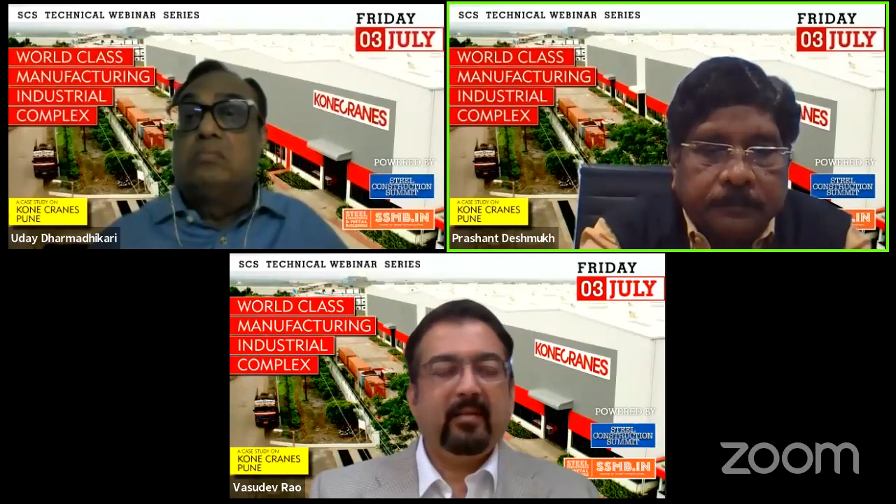Uday Dharmadhikari, Chairman and Advisory Committee, Indus Strategy Advisors and Managing Partner, Rebuild LLP. An innovative thinker with overall experience of more than 39 years and business leader for 18 years, he is known for brand building, creating profitable and sustainable business units, strategic alliances or partnerships in India and overseas, and growing startup organizations or business units to maturity level, with extensive experience and expertise in contract and project development management. He has also developed and implemented more than 10 million square feet of real estate projects in the fields of residential, commercial, hospitality, affordable housing, retail, educational institutes, healthcare, etc.

Now our speakers. Prashant Deshmukh, Principal Architect, Prashant Deshmukh and Associates, a ranker from JJ College of Architecture with an experience of over 40 years. He has designed and executed many industrial, commercial, and educational projects, which have won him highest appreciation at the national level. Prashant has received awards for his professional contribution on many projects. Deshmukh's papers in architecture, project management, and professional practice have been published by leading newspapers and architectural magazines.

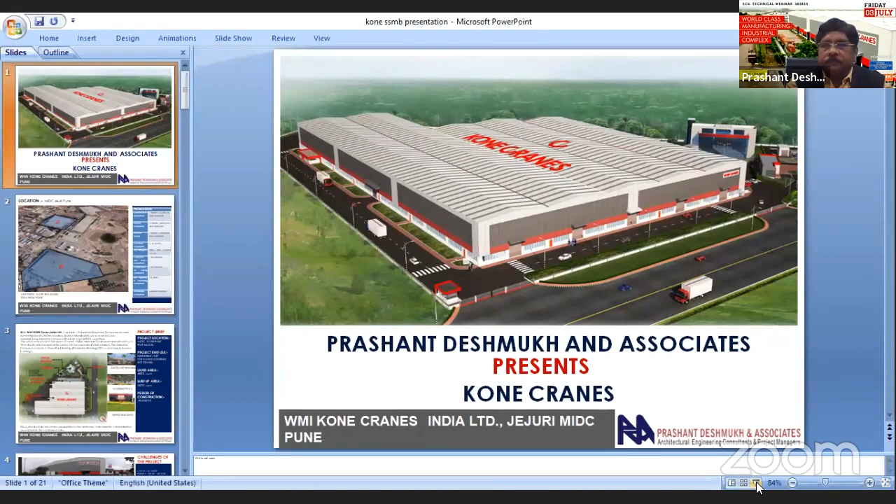Prashantji, you need to start your presentation. Okay. Good evening, viewers, and good evening, friends as well. At the outset, let me thank MX Business Media for giving this opportunity to share one of the thrilling experiences I had in creating this wonderful world standard industrial complex for Kone Cranes.

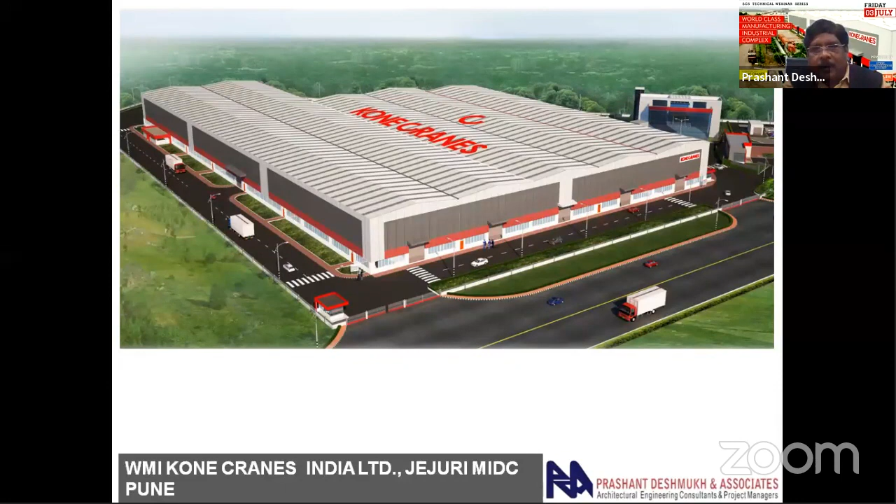The story, my dear friends, started where the WMI Cranes plant at Bhandup was taken over by this Finland company, Kone Cranes. WMI coincidentally also had a similar kind of project in Jejuri, which was also taken over. And then we also went for another new plot where this greenfield project was to be raised.

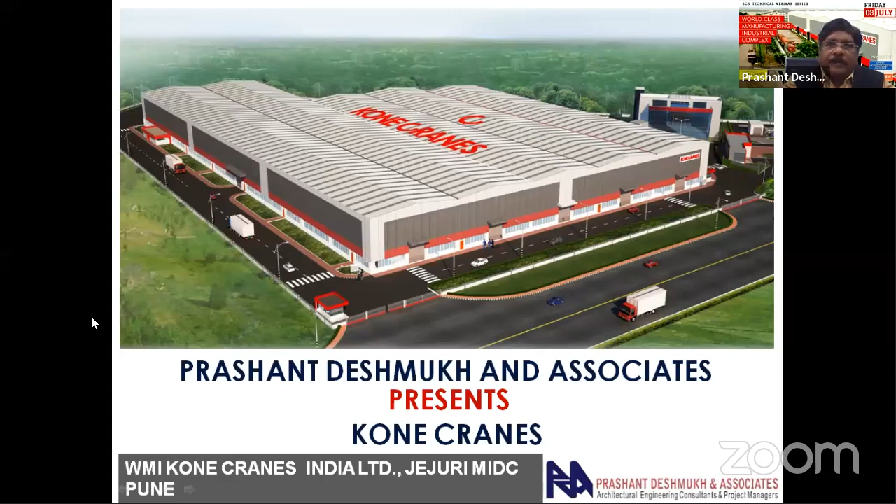So across the same campus, I'm just showing you the Google images of both. We are just about 50 kilometers from Pune. This is the Jejuri MIDC, and this is a landmark project as far as MIDC is concerned. We have two projects therefore: one was the retrofitting project, which was J1, and the other one was the greenfield project, which is J2. Both together had a land area of around 25 acres.

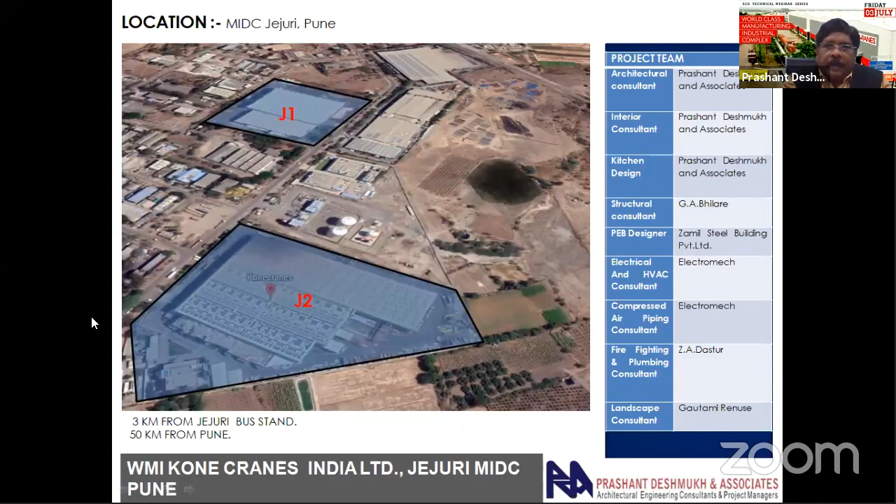And this is the master plan of this first unit, which is a greenfield project. That's the main road that you see across. And then we had these 5 bays of 26 meters each.

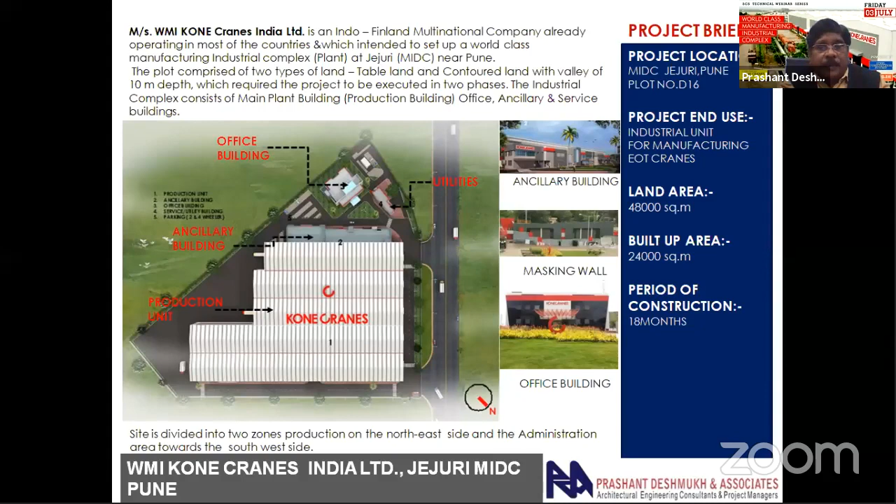Then moving on, because of the shape and size of the site, we had to squeeze in the length as well. So starting from 200 meters, we had to go down to about 130 meters at the end. Then abutting it was an ancillary building comprising all the supervisory offices and the canteen and all that. And then we had a very iconic office building placed there in a secluded area, and we had no other area left, but that was for the utilities.

And you will see that all these were gelling together as a campus design as far as this particular unit design was concerned. Now, these are a few interesting photographs which I am trying to show you. We developed this with a little different kind of color scheme of light and dark gray, which is very popular in Europe, as you all know. The logo you see is of Kone Cranes, and I tried to touch base with their very famous, world-over popular color, the red color.

We took the RAL shade from them, and thanks to Zamil that they could get all that red sheets, specially painted, specially pre-coated for us, and they were used everywhere across the project.

We also had a big slope of 9.5 meters in the project, and the condition of the clients was that they wanted to have one level, basically because it was going to be a heavy engineering project. The normal structural designers would go for an RCC retaining wall, or maybe a plumb concrete retaining wall.

But we actually ventured into what is known as the Gabion wall. We had a Gabion wall, then we had a pin joint, because Gabion is a flexible unit, as you all know. And then we had a rigid compound wall standing over it with a kind of a pin detail. We had actually worked out very well with Zamil for all those 5 bays, which I will revisit when I explain on that.

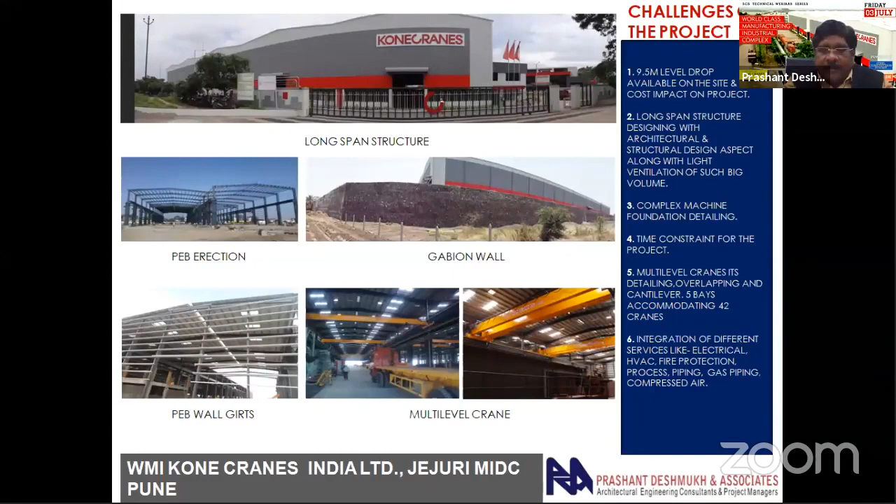So PEB erection, PEB wall girts were the stages, but the very important thing is around 42 different cranes within the factory. Now, these cranes were EOT cranes and at the same time wall traveler cranes. Probably for the first time in Asia, this kind of a complex crane design within the building was to be done.

We have kind of pioneered the PEB construction in India. We always say that. Although there are PEB agencies coming from abroad, like the branded companies like Kirby and Zamil and so many other companies that have come in India today. But then we have formalized how we can actually select an agency. So the format is being shown to you, and we kind of fill up the gaps so that the PEB agency rightfully knows what is the job like.

So we have as the length and the width, the center to center column spacing that we are looking at, the kind of roof slope that we want, and the type of bracing on the walls that we need or we do not need. It is to be specified.

We have the specific roof panels to be raised. Similarly, the wall panels, like in certain projects, we have also used sandwiched Galvalume wall panels. Then we have girts, accessories. We specify the accessories as well, or we discuss across the suppliers.

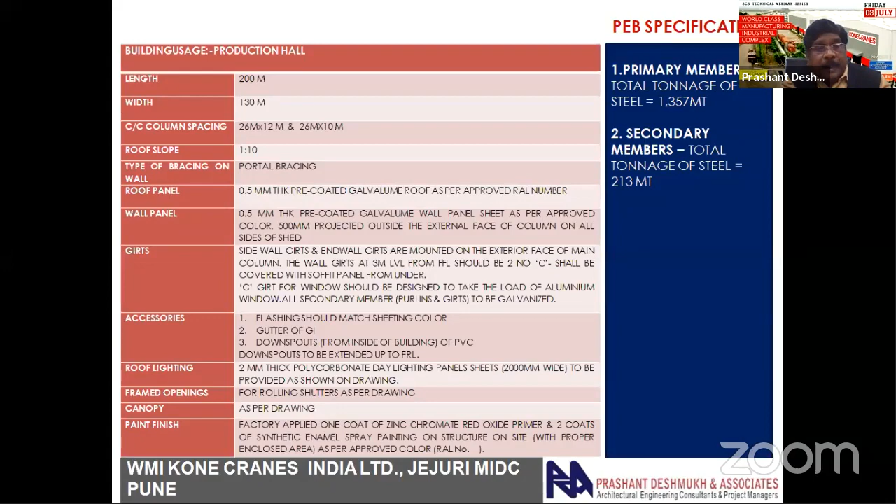Most of the time we nowadays go with the polycarbonate roof lighting, so that the entire production hall is always lit, and we don't have to spend more on the electrical lighting as such. We also go for the framed opening wherever the openings are, for the rolling shutters and all that. And also, specifically, we write about the canopy design and the specific paint finishes that we require.

Now, this is the plan of that building, which unfortunately we had to do in 2 phases because of the slope of the ground, as I said. So the rest of the light yellow area that you see, we were still doing the kind of refilling with the murum and then trying to actually roll it out.

But the first area of 200 meters that we started with comprises of 26 meters, 5 bays with heavy loading, as I explained to you. And so this first phase was consisting of 200 meters by 52 meters. This had a big height as well.

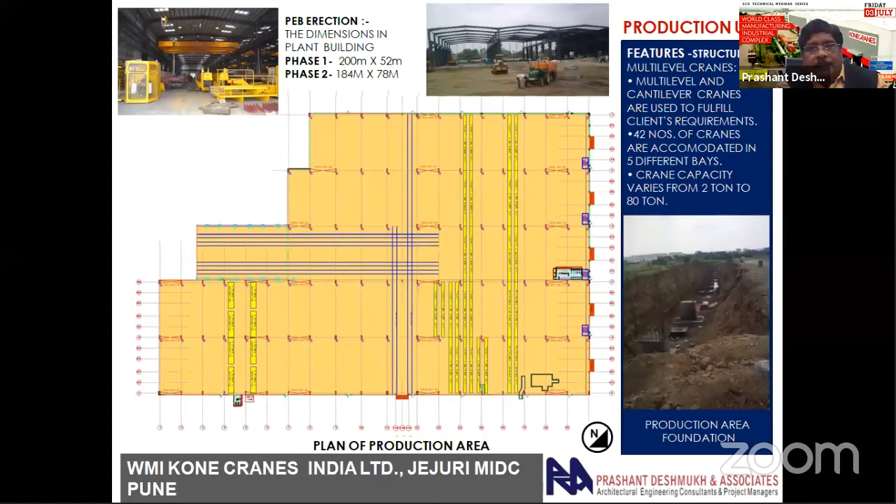This is a brief which explains about the number of cranes that we were considering, the EOTs. I'm not showing the wall cranes there, but the rails in the flooring for the movement of the crane once they are fabricated. And for these rails, we had specifically a beam design below the floor.

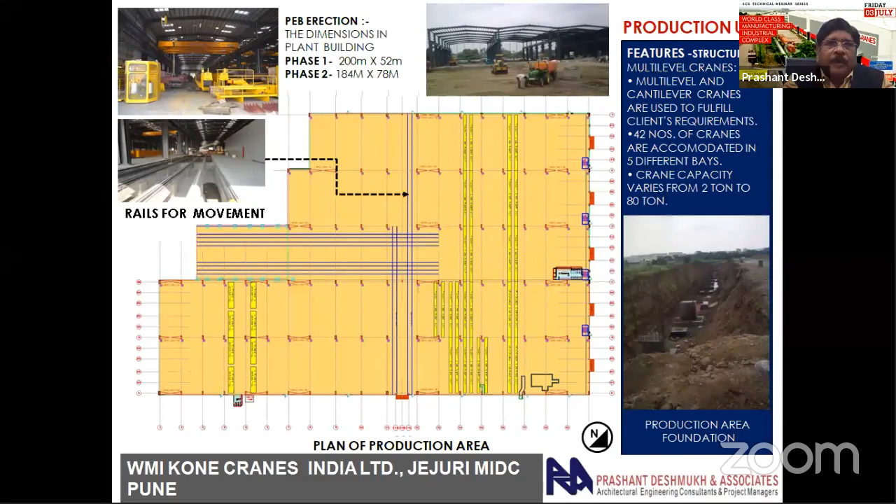PDA always believes in continuous glazing at the work level and the roof level glazing. Now, this gives you a tremendous amount of light in the production area and takes care of the air changes that the factory inspector specifies - 6 air changes. We normally give around 8 to 10 air changes at times without getting into the artificial ventilation also.

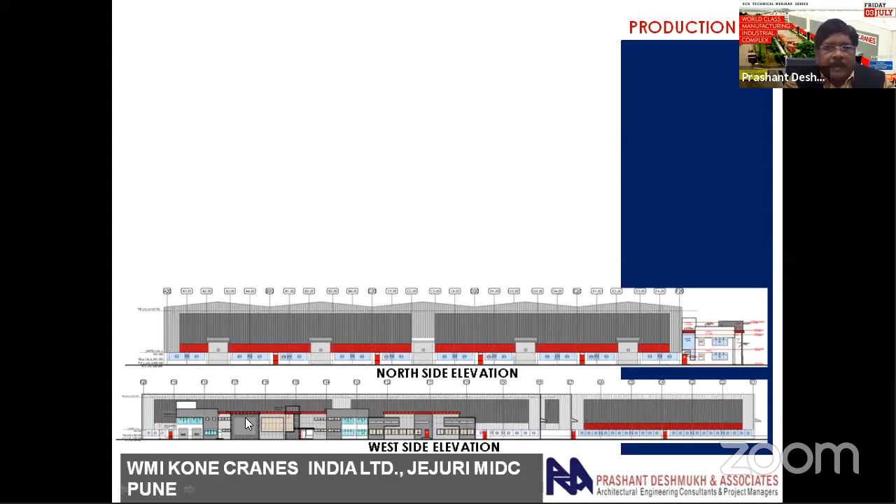The lower portion actually shows how we had designed the ancillary building, which also had tinges of the red color that we were using for the main building.

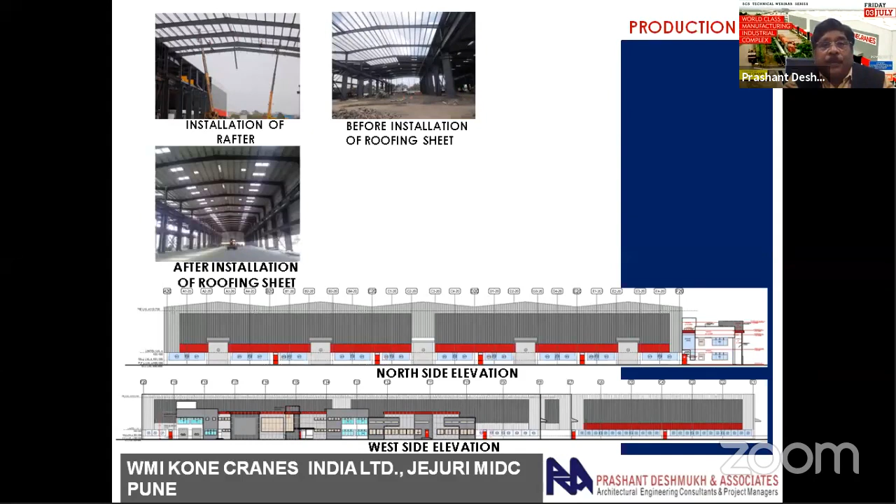Now, these are the stages where we actually started in the first bay with the installation of the PEB structurals, as we call primary and the secondary ones. This is before you get onto the roofing sheets. Then you get onto the roofing sheets with roof lights.

And then finally, we come to the cladding side. And these are the wall girts. I'll come to revisit the wall girt part also. And finally, you get the entire industry as we had drafted out. Just compare the elevation and the actual product - you will find it is 100% the same.

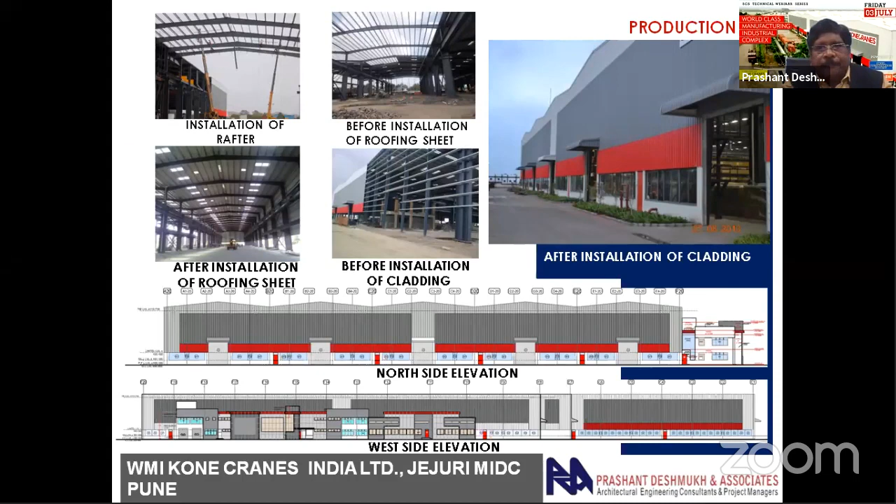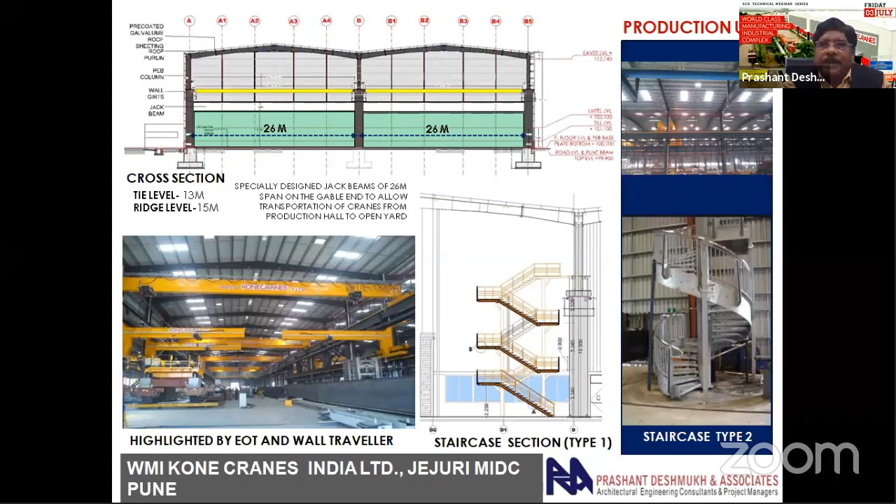We of course take a lot of effort on the sections. Normally there is a problem between when you have this PEB design as to where we take the walls. So we have evolved a system where we have a wall which is a little away from the main steel member, along with padding of the profiled sheets.

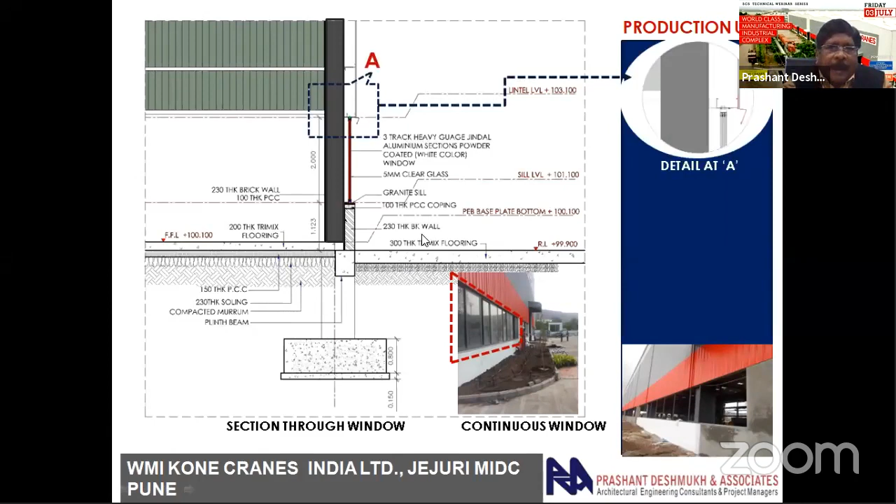And then we have the windows, and special detailing is done at the window sill level and the window top level. So at window top level, we ask for a special flashing from these people and the C-girt. This C-girt is specially designed to take that width away out of the steel column, and also to take care of the window top member.

Whereas the stepped sill actually takes care of the window bottom member, and that is how I can have the running glazing across, hiding the columns, so you don't see any columns outside, you don't see any downtakes from outside, and the building looks as a very clean and streamlined building.

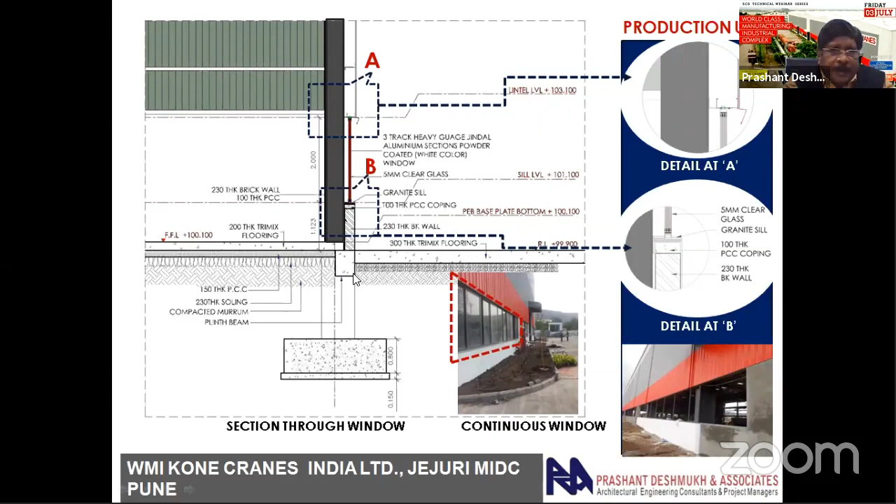The detailing for the foundation - you can see that we detail this out with a specially designed beam at the column size that takes care of the base plate of the main steel member, and also acts as a base for the brickwork to be raised.

Now this is what I was talking about, the downtakes that we design in the gutters, where you will find that this is how the water is taken out. On the right side, you see a base plate of a column, and you also see a stormwater drain which passes through the production area.

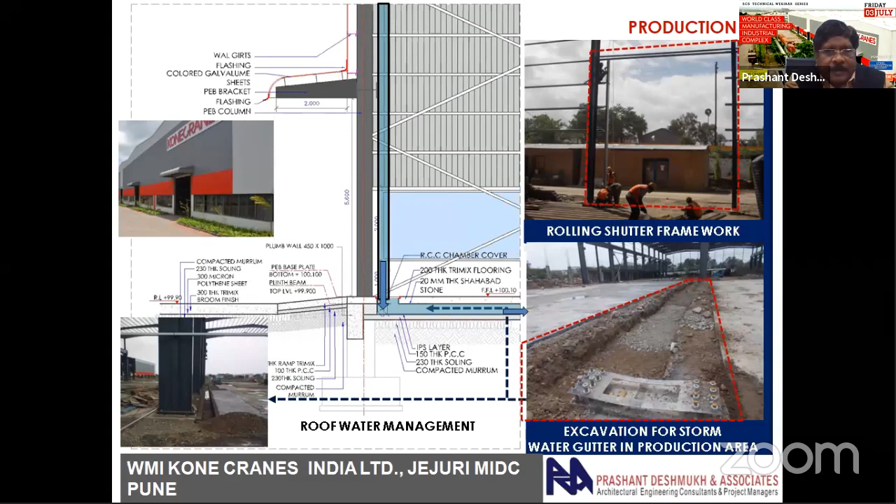And we had no option because there were 5 bays of 26 meters, so we needed to take the stormwater, and this was taken through that with some inspection chambers at certain levels. But this was also very well designed, and we don't have any problem of any leakage or water coming into the production area over so many years after the project has been done.

This is the ancillary building which takes care of the canteen on the first floor, the stores on the ground floor, and the supervisory offices and the facilities for the workers. So the main thing here again is the kissing of the column of the RCC building and the steel building.

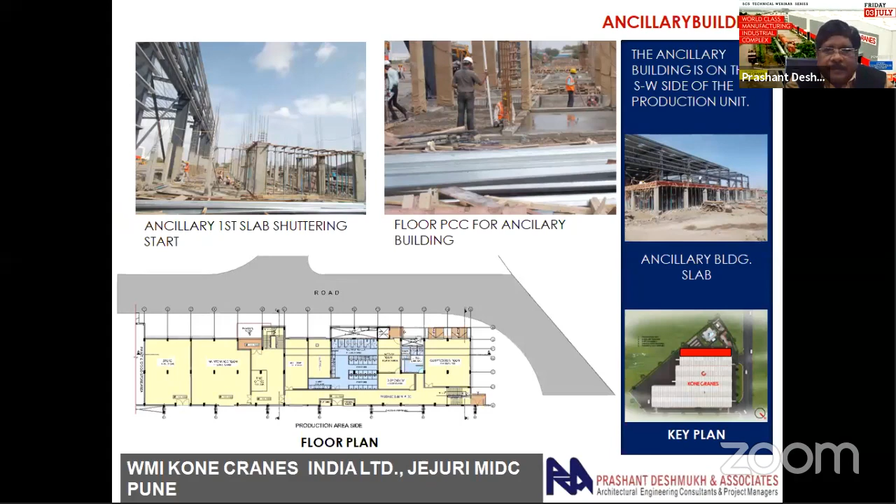When you see, I'm trying to show you this particular triangle here - this is the beauty of the complex, the campus design. When you think of the total perspective that has to be visualized, we try to add on certain elements. Now the first floor canteen is added.

You can see that it overlooks into the production area. You also have a space frame to the office building, which casts a very beautiful play of light and shadow onto the ground.

We have all the road links, and each road is having a building. And this building that you see here is actually a service building, a utility building. And the utility building is given a masking wall. And today, if you see it, it is just a combination of the grays and the greens onto the wall. So if you visit today, it is all green. So, the landscape plays well, the logo stands out there, and it becomes a part of the campus.

So actually, even in industry, I believe, like the residential or commercial, we can also think of giving the campus touch, and actually give equal weightage to all the buildings, be it a utility building, a service building, or an office building.

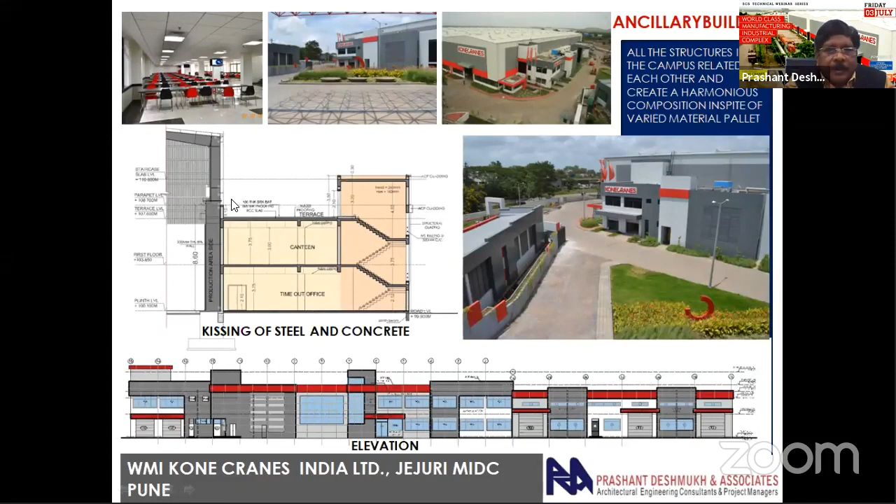On the left side, I think you see the particular section that we detailed out, where we have that kissing of steel and concrete. And thanks to Zamil, that again, they brought the sheet down, and then we had special flashing made over the wall to put the water down onto the terrace, and then it was drained out. And that's the reason it is never leaking whatsoever.

This is an interesting office building, and I believe we got the ICI, the Indian Concrete Institute Award, basically because of this particular building that we raised. It's again a combination of the black glass and the red against the greens of the landscape, and then we have about 7.5 meter cantilever space frame. Along with that is a glass on the top, and that's how the light gets filtered and creates some play of light and shadow on the grounds.

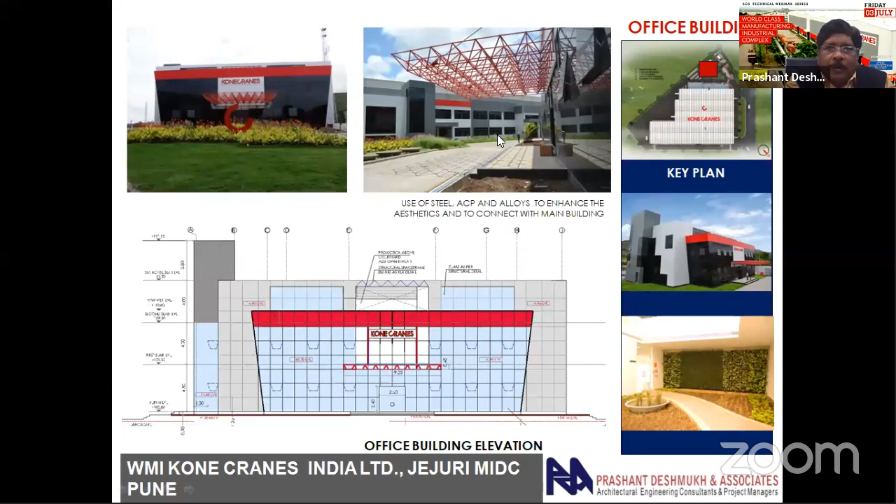And we also have an atrium in the center with skylight from the top and a space frame on the top. We'll just visit that as well. And there is a green wall welcoming you as soon as you enter the building. So that's what I was trying to explain to you. An atrium with the space frame on the top, a big span, and specially designed with a proper detailing and the design which was given by us to them.

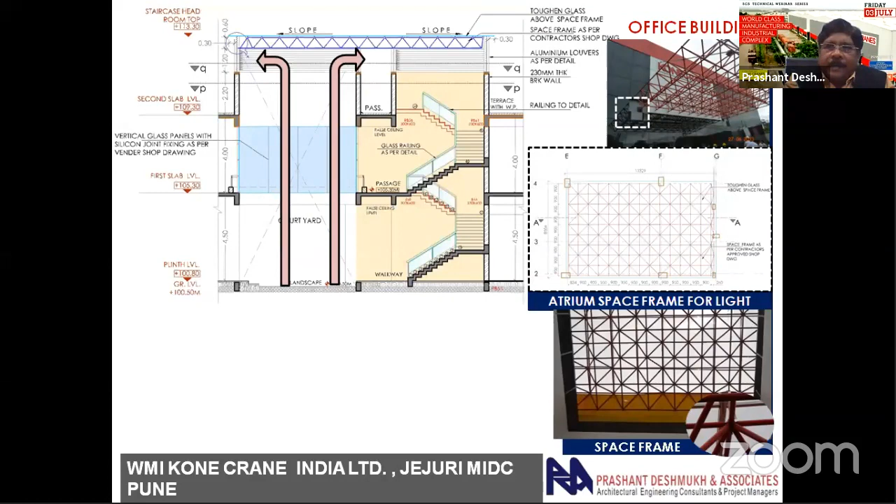And then the entire office building was air conditioned. The atrium was not. It was exposed to the sun, and we tried to take the hot air out. So there was a detailing done. A lot of detailing actually goes into it, and it's very, very interesting to do that.

These are very close views of that cantilevered entrance canopy which was in space frame. And this picture also shows you what space frame we had onto the atrium part, where both of them play together hand in glove. And this is actually a backdrop for the name of the company called Konecranes. So such a beautiful entrance that we could carve out, and we also actually married it with the front landscape, and the logo stood out there.

So this is really highly appreciated by the Finland people, and they love it. I believe if you get time to visit their office in Finland, this building photograph is very much there at the reception. This was the other unit which we called J1.

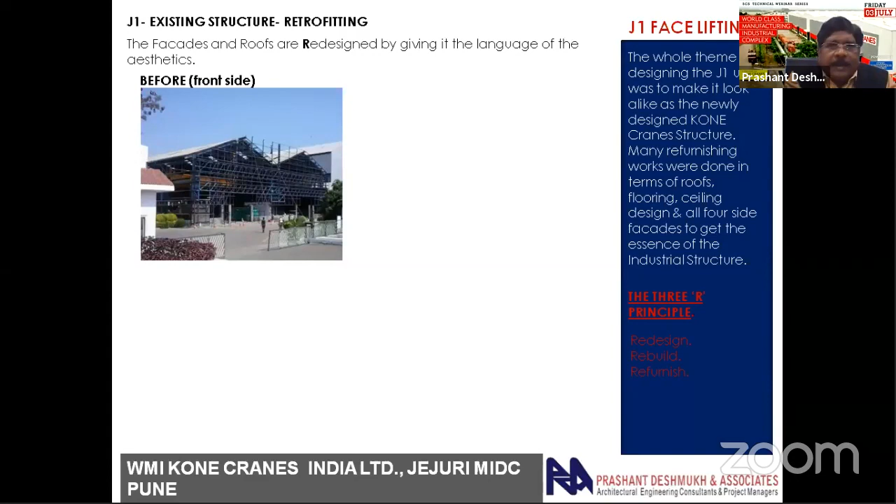It was an old WMI factory which we took over, and the condition was that this building ultimately at the end of the day should look like a family member of J2. So whatever kind of architecture that we used in J2 should be replicated in J1. That is what they actually gave us. And that's where you will find that similar things were done again.

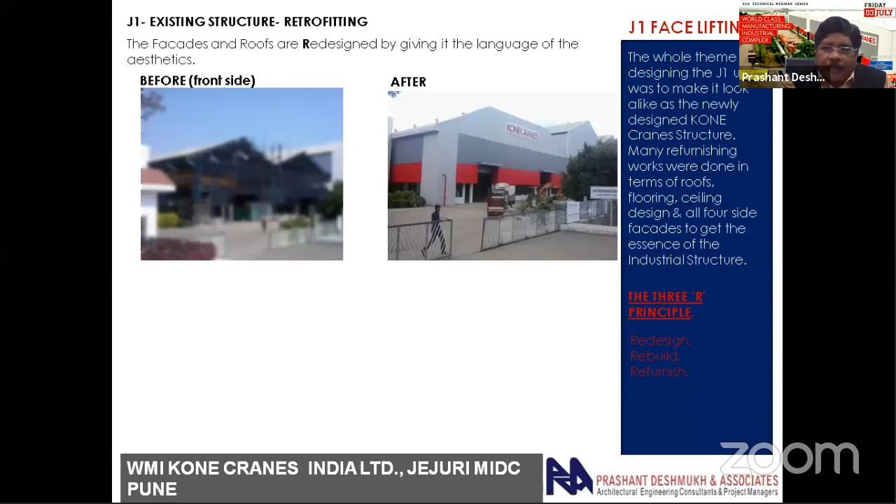Of course, we had to strengthen certain columns. We had to do a lot of work on the steel. We had to add on the gables in a very interesting fashion. We changed the entire sheeting to galvalume sheets. We added those beautiful red strips there, and then it started looking the same as that of J2.

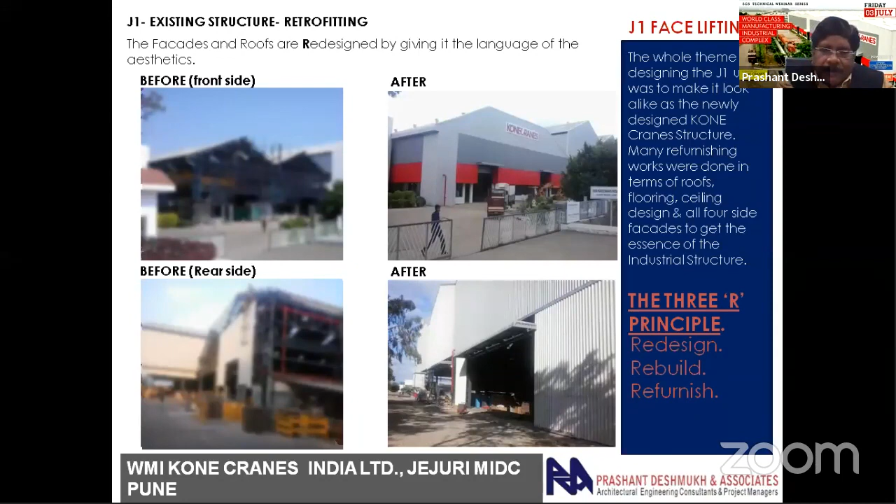And this is also a picture where we did not leave the rear wall or the rear side also. Normally people would leave that out, but we continued with the same kind of canopies and the same kind of cladding of sheets there. So in this particular building, the 3 Rs was the principle, as I say: redesign, rebuild, and refurnish. And refurnish as if it's absolutely new.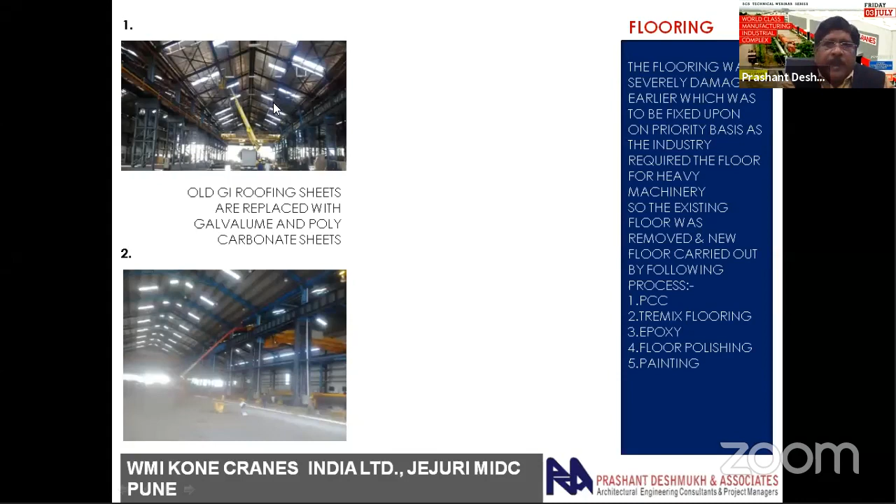We also did a lot of work there in the interiors, as I said. As far as the roofing was concerned, the earlier photo on the top shows how poor the lighting was there. We converted that by adding some roof lights, and then we dealt with the floor as well. We had a rubbish floor there, so we removed the entire floor. We had a new Tremix laid down with Bekaert steel fibers, and we also went for an epoxy topping.

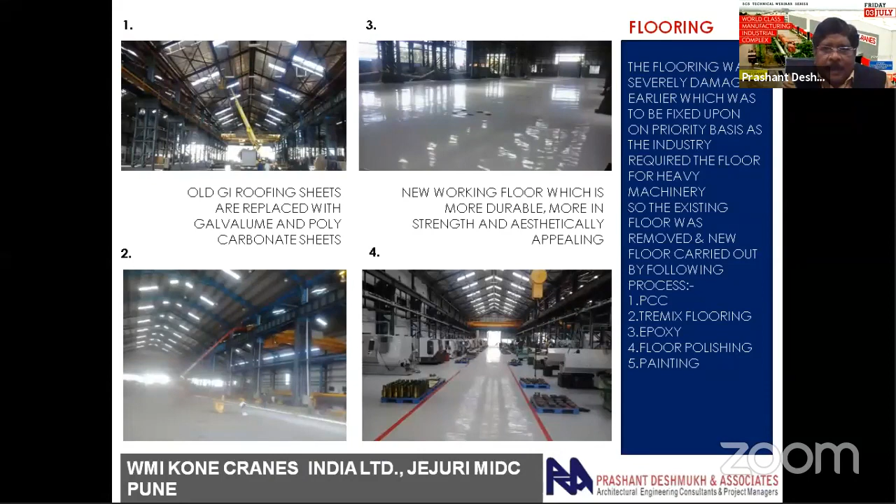And we, of course, relayed all the machinery that was there in their Bhandup plant. Of course, it was a tough job. We had about 7 engineers and architects every day at the site. And this is ultimately the drawing that we presented to them, showing how it's going to look once these things are set right. A lot of details went into it.

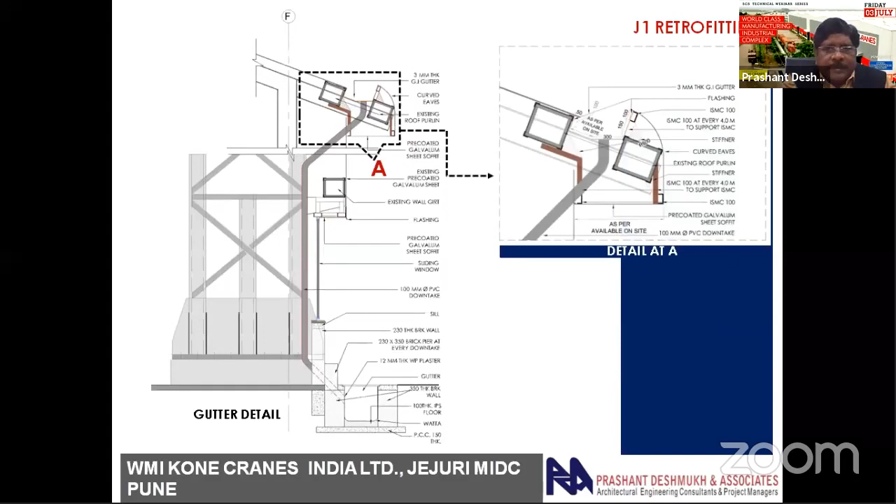We also modified the downtake details, which were not in place those days, and also modified the window details, which I have explained to you. For the window top detail, we had the soffit panel coming out from the flashing at the top of the window. And then, as I told you, we broke the flooring. We had to redo all the casting of the various foundations for the heavy machines that were there. And the building steel played a huge role in this.

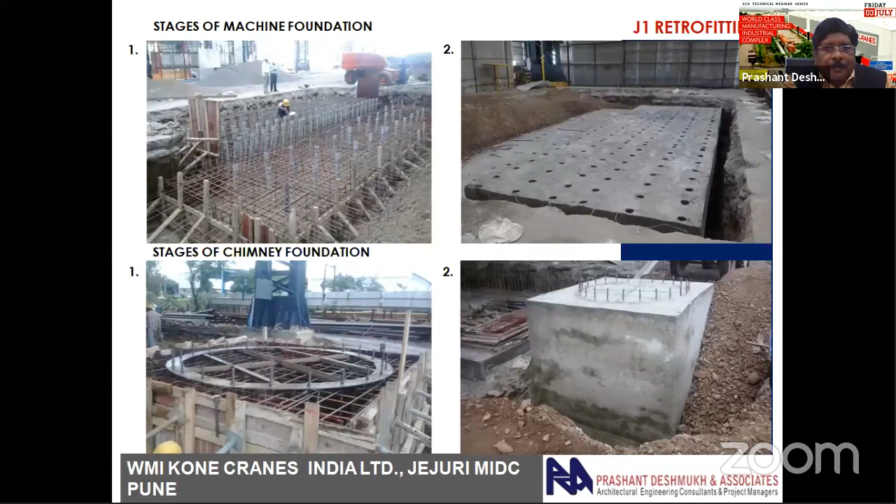At the end of the day, we could deliver both these projects, which have become landmarks in themselves and probably landmarks as far as industrial architecture is concerned in the world. And thanks to Zamil that they went on with all my ideas and dreams, did a lot of homework out of the books, and really put in tremendous efforts. Thanks once again for patient listening, and we are always there for all those projects that come in.

So, friends, architects should venture by using steel as a major building material and empower it with aesthetic aggression to make imposing compositions; that is my punchline. Steel, other metals and alloys are going to be the players of the game. Please be alert, try to keep your creativity on, and I'm sure you will create something wonderful and great. Thanks a lot once again.

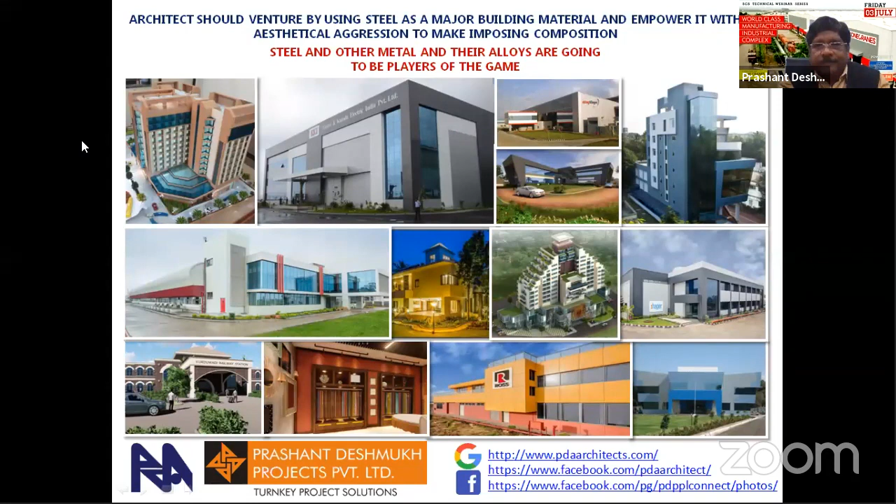Over to you, Vasudev. Yeah, Mr. Vasudev, please. Vasu, you may have to go to the slideshow or full screen. Yes, sir. No, I'm unable to see myself now. We can see you. But are you able to see the presentation? Yes, we are. Just go to the slideshow. Can you see this? Yes, but put it on full screen or slideshow. I clicked that. Now it's perfect. Thank you, Uday sir. Prashantji, very nice presentation.

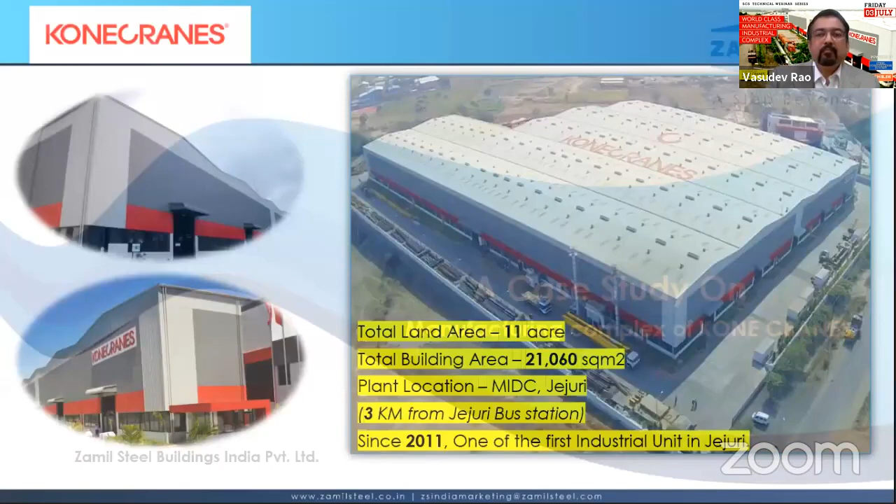To start with, this is the aerial view of the plant after execution, wherein phase 1 and phase 2 have both been executed. This is around 21,000 square meters spread across 11 acres of land. This is the most modern and first large, aesthetic complex located in this industrial development corporation area. This was in 2011 and 2012. At that time, not much development was seen; in the photograph you can see there is no development at all. So this is an iconic project, and after that the industrial development picked up very fast in this area.

This project, as Prashant sir said, was executed in 2 phases. The first phase consisted of the building with 2 bays of 26 meters each and a length of 200 meters. One of the salient features is the multiple number of cranes, and these cranes have mixed capacity. The largest are the high capacity 50 metric ton EOT cranes, 5 in number. As you can see here, in one bay there were 3 and in the next bay there were 2 such 50 metric ton EOT cranes.

And afterwards, similarly, there were another 4 EOT cranes of small capacity, that is around 5 metric tons, 2 each in each bay. And the more important thing is the wall mounted cranes. There are 4 numbers and each having a capacity of 3 metric tons.

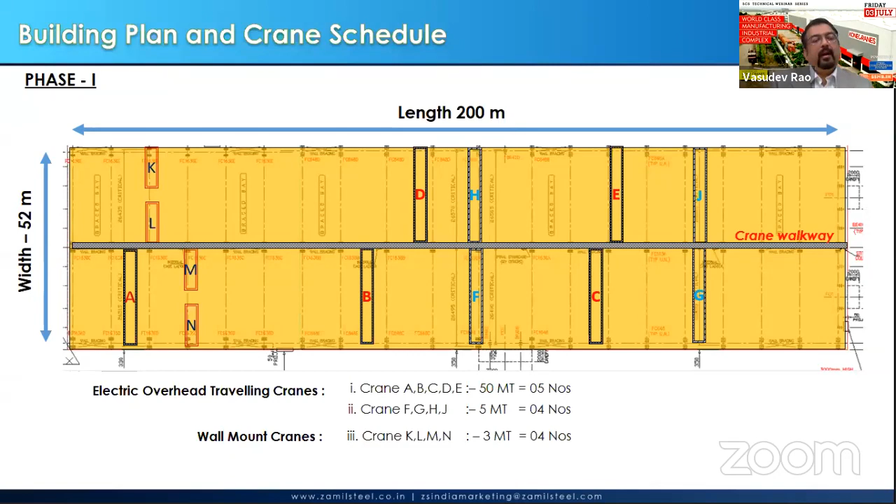And similarly, at the center, we are having the crane walkway provided throughout the length of the building. This is to service the cranes. This is at the gable end. And before completion of phase 1, phase 2 also started, and simultaneously we were able to cater to this phase 2 demand also.

Here, there were 3 bays of 26 meters each with a total width of 78 meters, and on one side the full length is 140 meters, and because of an offset at one side, the length was 130 meters. Here also, there were totally 6 cranes present, and these are all again high capacity, that is 50 metric ton EOT cranes. And again at the gable ends, a full length crane walkway to service these cranes for the maintenance.

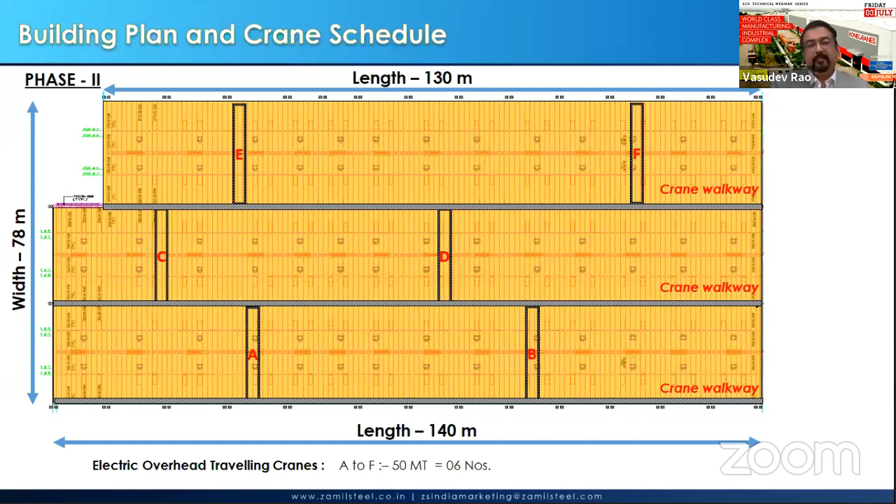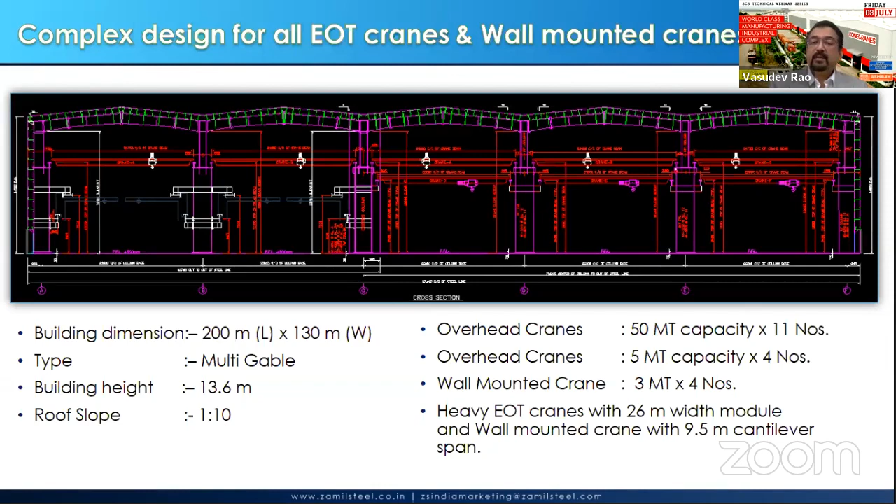And another feature of this wall mounted crane is the arm length, I will show in the next picture, the arm length of this one is around 9.5 meters, that is a cantilever. Before going into this project, a lot of thought goes into execution. So Zamil Steel, over a period of 4 decades of experience, has developed the majority of the proprietary tools and design to execute such complex projects.

The first one is called PIS, that is Project Information System. Here, all the data, the major data and including the minor data also from the contracts and everything, is captured and passed on to the design engineering. This data includes the building height, width, length, bay spacing, the column spacing, and up to the painting system also are included in this PI system.

And after receipt of this project data, our design team scrutinizes each and every data. And if any more clarity is required, the same thing is put back to the client through the area office. They are our nodal office. And after giving the clarity, then starts the real design. The first one is that the structure needs to be modeled and designed. For that, we use our proprietary in-house design tool called ASFAD.

This is advanced steel, as the name says, it is the most advanced steel design and analysis. And this is the best suited one for the PEB industry, because in ASFAD, the design is very easily done for the built up, as well as the fatigue analysis done for the crane members also. Normally, crane fatigue analysis you don't find in any third-party commercial software available in the market as of today.

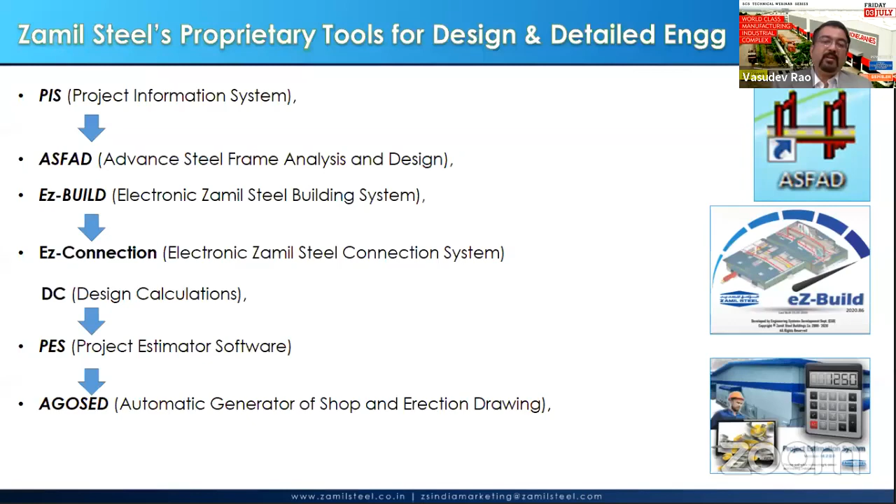And simultaneously, there will be meetings with the client for the approval and any design clarifications. Once the design is approved, the first phase of design is over. Then the second phase is the detailed engineering, wherein again you have got another in-house software called AGOSED. Now it is called Easy Detailing, with so many enhancements. And here, after giving the input, we can generate the shop and erection drawings very fast and automatically, also without any errors.

To come into this project, some of the major project design data are covered here. The first one is the material specifications. The built-up members are all 345 MPa grade. Cold forms are also 340. Sheeting is 345. Rod and angle bracings and anchor bolts are all 250 MPa. The connection bolts are all high grade with class 8.8.

And in this project, the design is done using the below codes. The loads are all MBMA; for built-up and HR, AISC codes are used. And AISI is used for the cold forms, and for the welding, AWS D1.1.

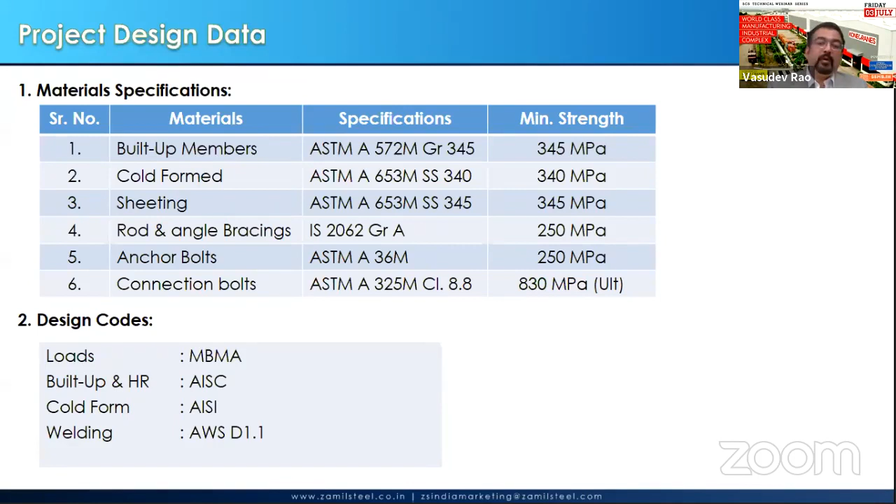For these heavy 50 metric ton EOT cranes, the column required stepping. And because of that, the column's width increased, and it was seen here that these columns are literally 1.4 meter in width, stepped at the top. And on both sides, you can see here the crane beams for the 50 metric ton crane supports. And at the center, there is a small stub used to support the roofing system.

The photograph on the right shows the column erection during installation, and the extreme right, bigger photo shows after installation. Here one can see the small stub with rafters supporting the roofing system, and below that is the stepped column with the crane beams supporting the 50 metric ton EOT crane.

And in our drawings, we also provide all the crane data we have used for the designing, so that this will be easy for the approval also. So what is the crane data used? Because this is one of the most crucial data as far as any design goes.

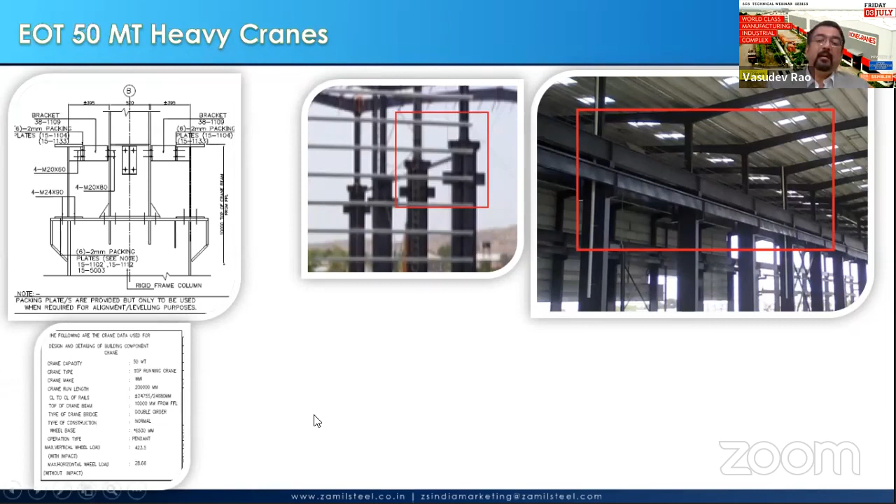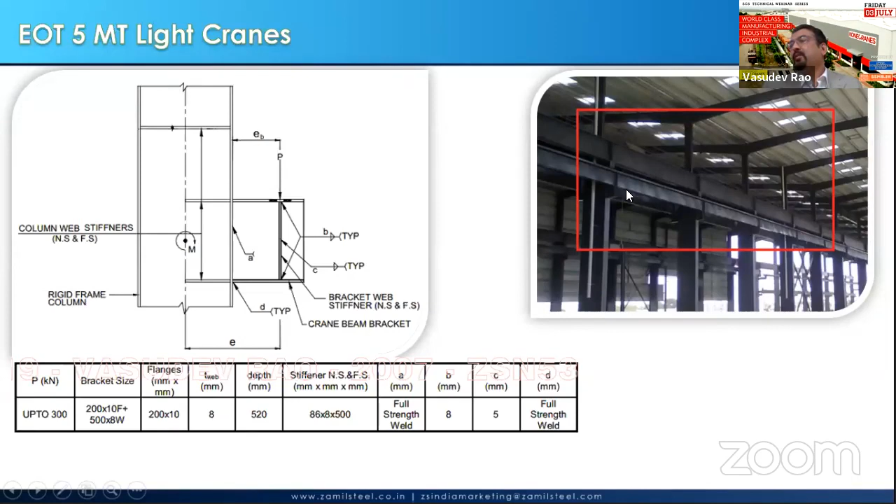Similarly, there were lesser tonnage EOT cranes also, that is 5 metric tons. And for these 5 metric ton EOT cranes, the crane beams are supported using crane brackets. These are fully welded to the columns. You can see here our typical detailing sketch. Here, the interface is fully welded, and below, supporting the crane, there is a stiffener. For that also, there will be welding. The right side picture shows the completed and installed crane beam for these smaller EOT cranes.

And while designing and detailing this project, there were certain challenges. The first challenge is the higher bay spacing. Actually, the bay spacing here varied from 10 meters to 14 meters. And as Prashant sir said when I discussed with him, this was due to the client requirement that the crane can be taken out from any bay. That is why even in the end wall, we don't have any end wall columns. There is a portal bracing given.

And because of these higher bay spacings, Zamil Steel had to design higher depth, that is a maximum depth of 250 millimeter nested purlins and girts. You can see here in this right side picture.

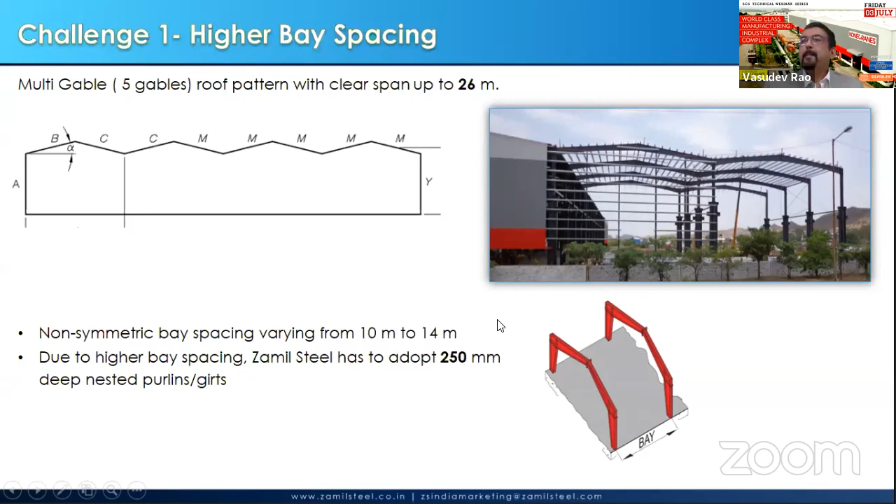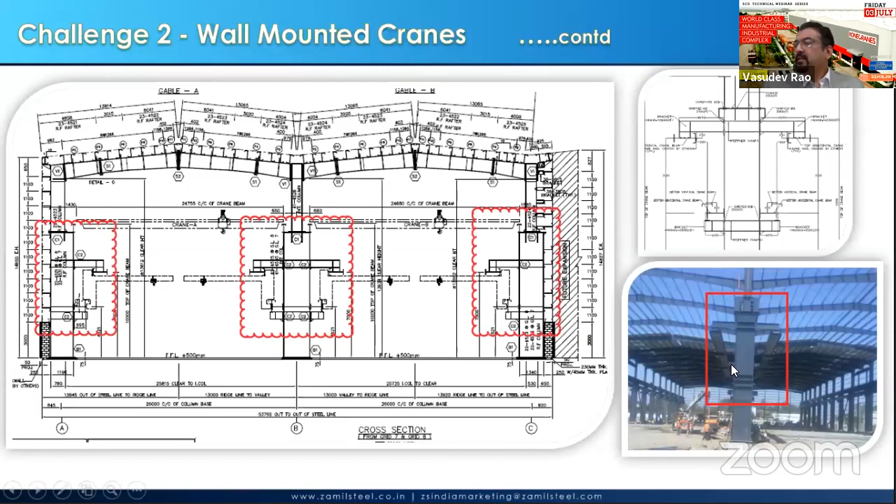And the second challenge is wall mounted cranes. As I said, this is the first time a wall mounted, that too a moving one, is used in a PEB structure. And here you can see in this clouded portion, these brackets are provided. Normally for any crane, there will be one normal wheel-supporting crane rail, but here it required two such crane rails. One is at the bottom and another one is at the side where there will be a side thrust. I will show in the next picture how exactly those wheels look. And the right side one is a picture during the erection stage; the crane beams have been installed for these wall mounted cranes.

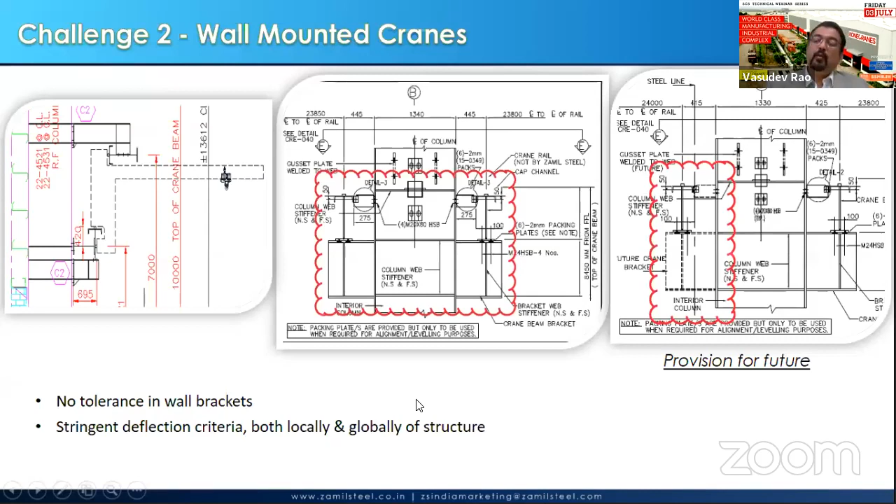One of the important factors in this is that there was no tolerance allowed in any of these wall brackets. And the second one is the stringent deflection criteria, both locally as well as globally for the structure. This is to ensure that even though the building deflects globally, it does not affect this wall mounted crane movement. That's why it was very stringent, and because of our design superiority, it was executed very well without any problem.

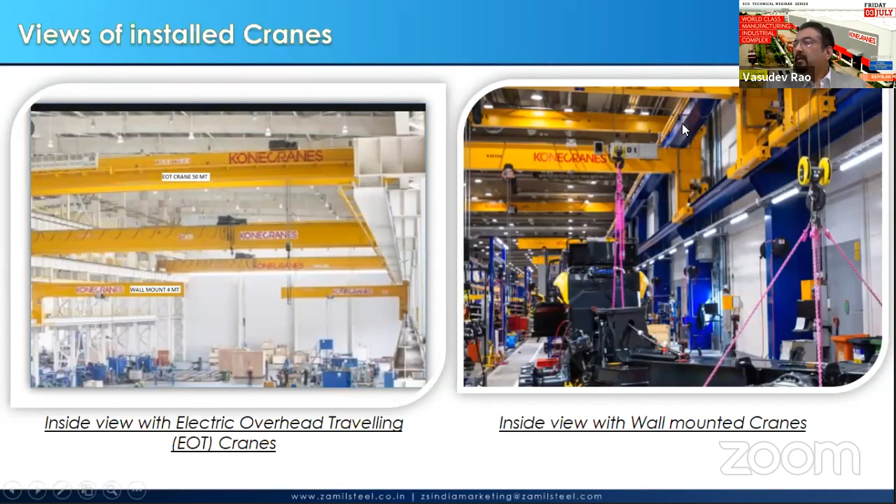And these pictures are taken after the installation of the cranes and during working. These cranes are successfully installed, and one can see here a 50 metric ton EOT crane and also a wall-mounted moving crane here. And the right-hand side one, here it shows there is a wheel here and also on the top from the side. And here the crane beam is provided horizontally.

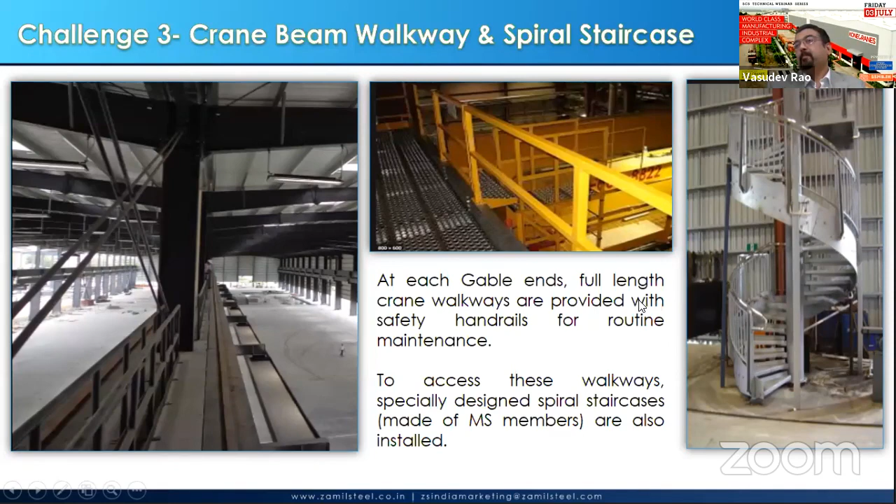Another challenge is at the gable end, we have provided full-length crane walkways. And to access these crane walkways, the architect demanded a spiral staircase. Normally, half-landing staircases are provided in almost all industrial units, but here for aesthetics, a spiral staircase was provided, and Zamil could provide this, made up of MS members, beautifully as per architecture requirement. And these are certain pictures taken during the installation or erection of the building, and finally during operation stage.

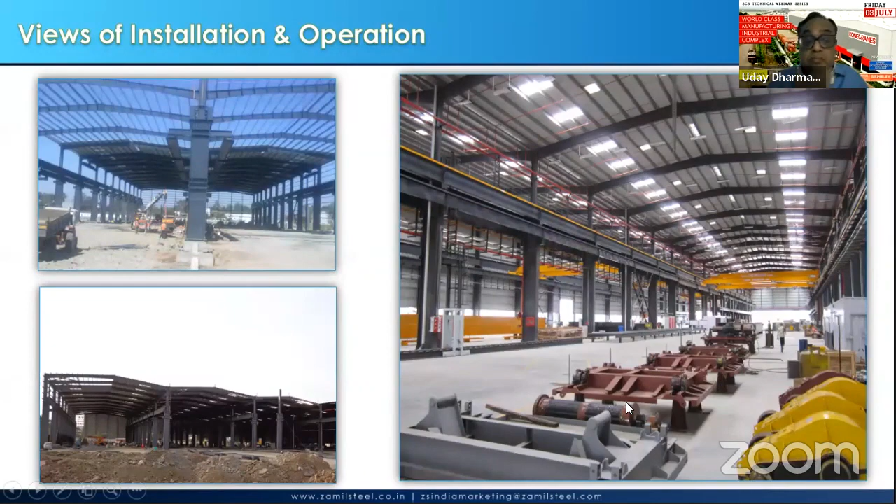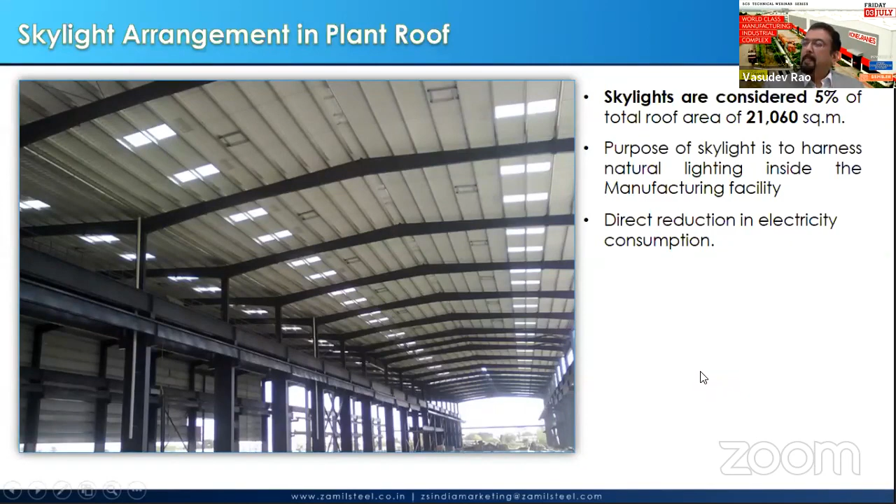Also, to harness the natural lighting and to reduce the dependency on electricity consumption, the architect demanded that the roof has to be provided with a minimum 5% of skylights. Accordingly, on 5% of the total roof area we provided the skylight, and during daylight there is very less dependency on electricity consumption, and it provides the natural lighting.

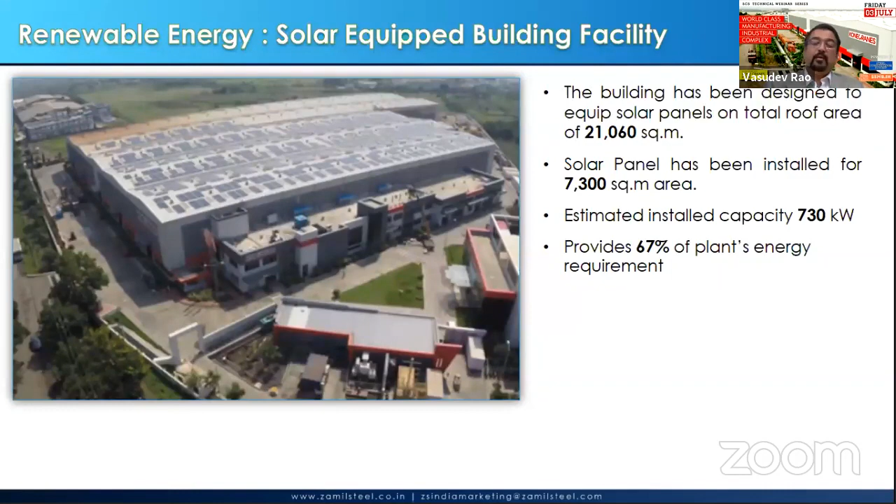After plant completion, the client wanted to harness renewable energy, and as per that, he provided the solar panels on the rooftop, and the estimated installed capacity was around 730 kilowatt, and it caters to 67% of the plant's energy requirement.

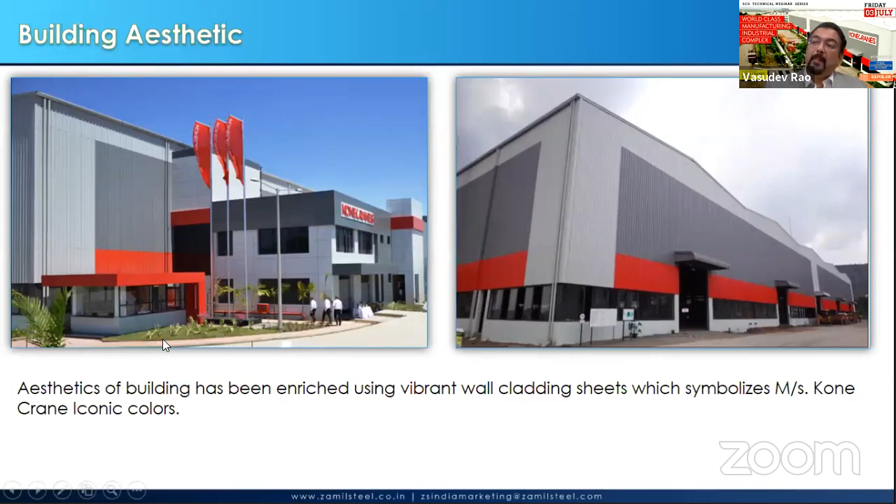Building aesthetics, Prashant sir has already covered it majorly, and here the aesthetics we could provide in different color shades. What you can see here is the one color, these two match the client's iconic colors requirement, and this is successfully executed also.

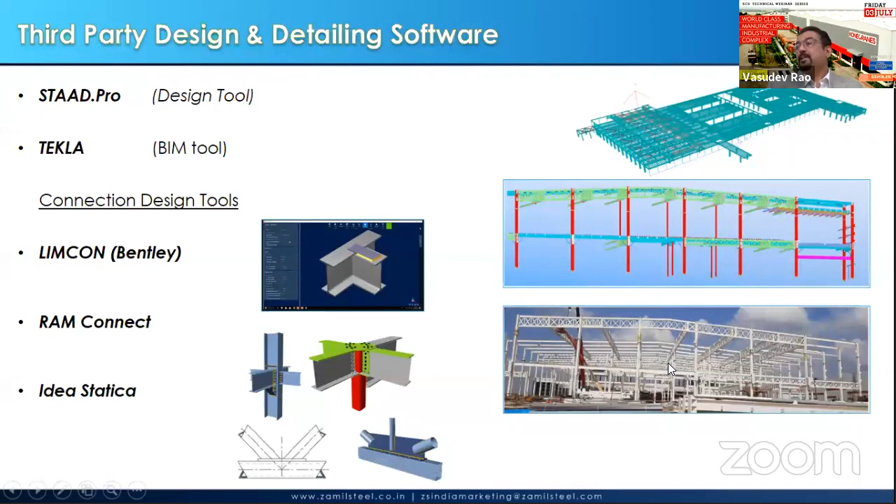Recently, we completed a big project wherein the topmost one shows the STAAD Pro model, the middle one here is the Tekla model, and the bottom one you can see here, it is executed as detailed. And all such complex projects are possible because of our most modern plant, located here at Ranjangaon. Here, in our fabrication strengths, almost all the equipment is present, and it can cater to any complex project.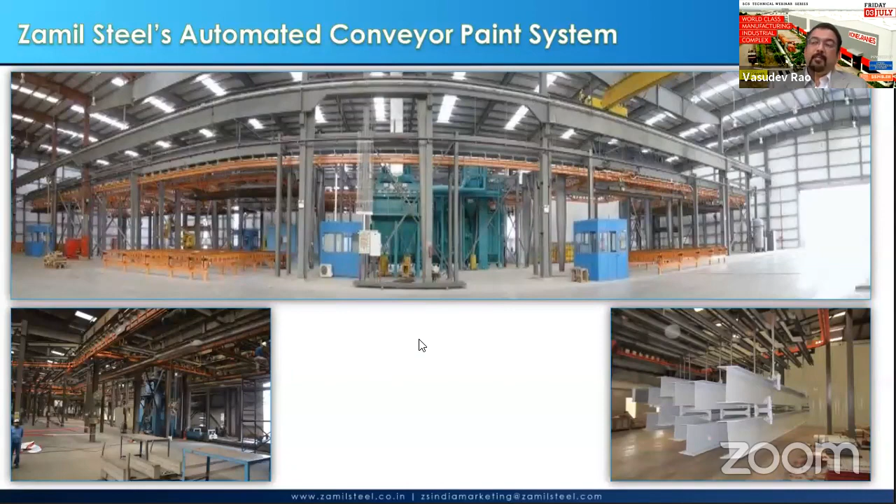Before closing, I want to say one thing: considering the design freedom, productivity, aesthetics, sustainability and innovation being achieved, steel is the way of life. Currently, in India, the per capita consumption of steel is hardly 60 kgs as per one report. This is way below the global per capita consumption of steel. So thus, steel will be the only way of life because of its flexibility, and also because of its ductility, and it can be used in any form. With this, I'll close my presentation.